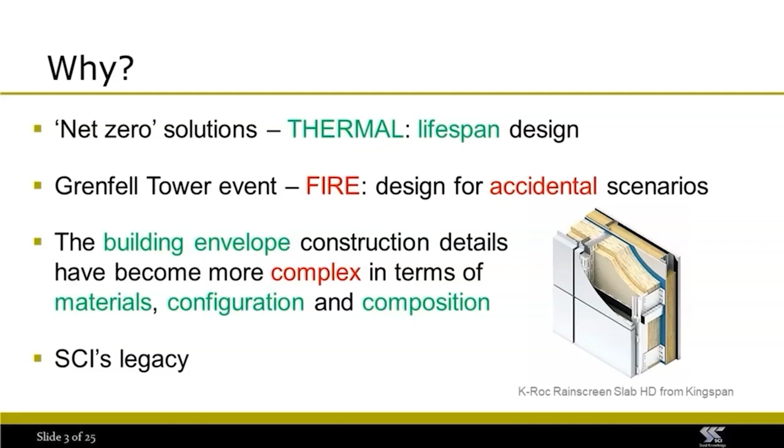SCI is in a unique position to help the industry in providing consultancy and assessment of construction detail solutions for the building envelope towards a more efficient insulation system, contributing to the net zero carbon philosophy.

So when we refer to the term building envelope, what we specifically refer to is the walls, floor, roof, windows, and doors. It is the physical separation between the interior and exterior - the climatic modifier that creates and contains the internal conditions.

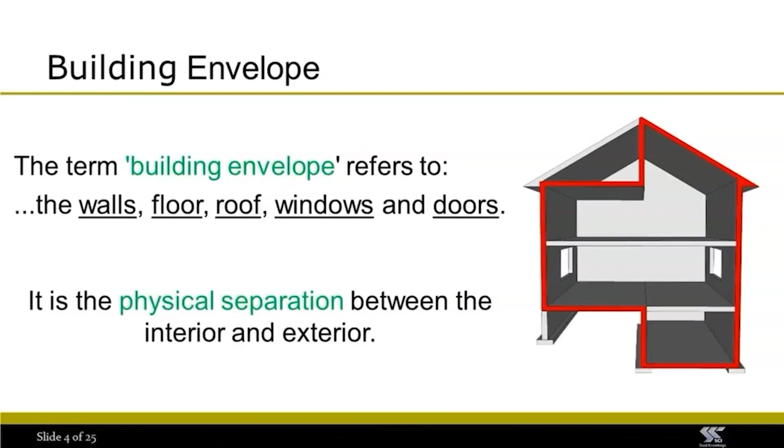SCI has been involved in several multi-year and multi-partner projects with focus on the thermal performance of buildings. Two of these projects where SCI acted as the coordinator partner were TABASCO and BATIMASS. Among other topics, the importance of thermal bridging in steel construction was investigated for both hot-rolled steel and light steel frame systems.

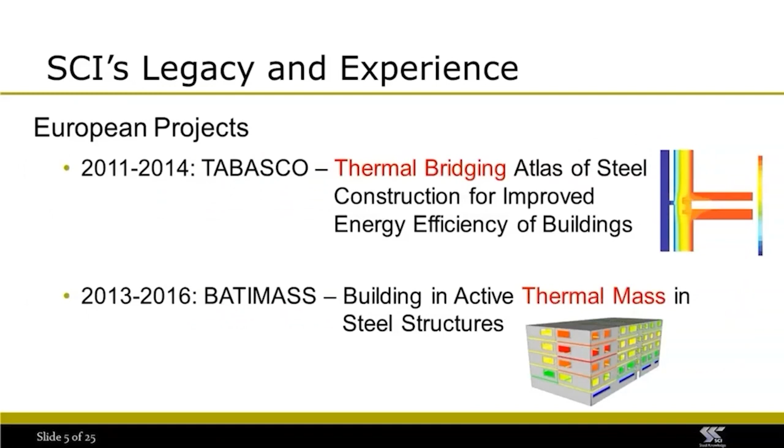Thermal bridges within the thermal insulated layer of a building, or at junctions in building envelopes, occur in all forms of construction and should be minimized as they add to the overall heat loss. For structures in steel, since steel has high thermal conductivity, this is of great importance.

Thermal bridges occur where the insulation layer within the building envelope is penetrated by material with relatively high thermal conductivity, and at interfaces between building elements where there's a discontinuity in the insulation.

Thermal bridges result in local heat losses, which means more energy is required to maintain the internal temperature of the building, and lower internal surface temperatures around the thermal bridge, which can cause condensation that may lead to mold growth.

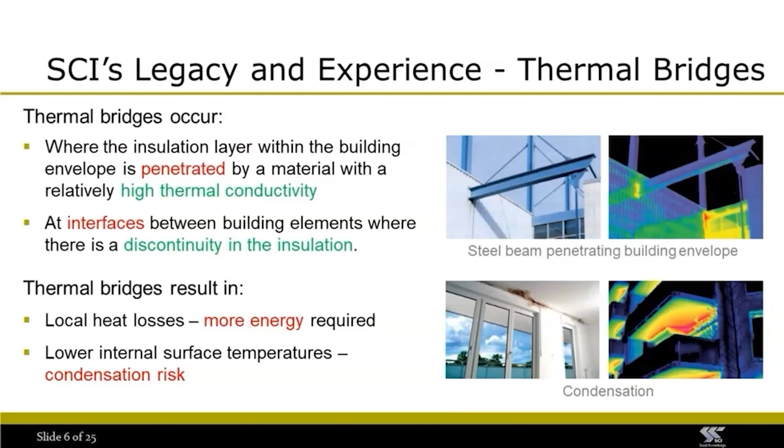SCI's most recent publications on thermal bridging and guidance to minimize their effects are P410, which focuses on structures with hot-rolled steel members, and P411 for light steel framing and modular construction.

P424 is one of the latest SCI publications, and as Callum touched upon, it provides guidance on how light steel frame buildings should be designed and detailed to provide fire resistance in accordance with the building regulations.

To assess an element in fire or thermal insulation, certain design criteria need to be determined. For fire, this is the resultant temperature profile of the system in consideration after a 30, 60, 90, or 120-minute exposure to fire, while the thermal insulation performance of a planar element can be expressed as a U value, which relates to an area, or a psi value, which is associated with linear thermal transmittance.

Condensation risk, given by the calculation of the fRsi value, may be determined accurately using advanced thermal modeling, but more details on this a bit later on. An assessment will allow us to quantify the effect of thermal bridges and the consequence on the use of appropriate thermal breaks to minimize heat loss.

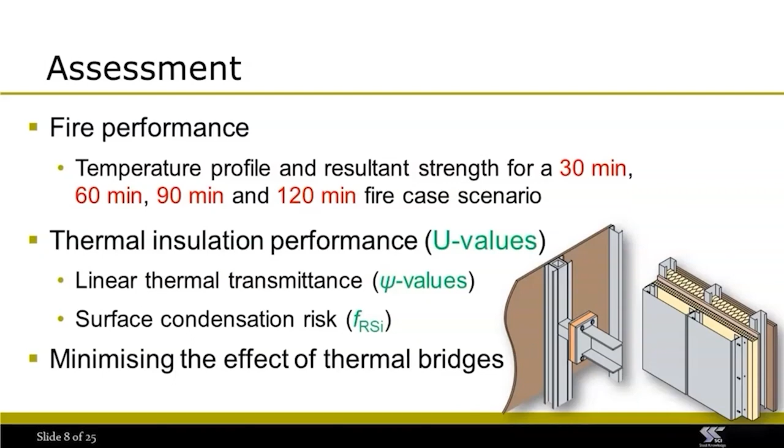SCI has developed algorithms for facilitating the conversion of 2D CAD construction details into 2D or 3D thermal models for use with software such as finite element analysis software, which is capable of carrying out a transient heat flow analysis, allowing study of a fire case scenario where the radiative heat transfer is nonlinear.

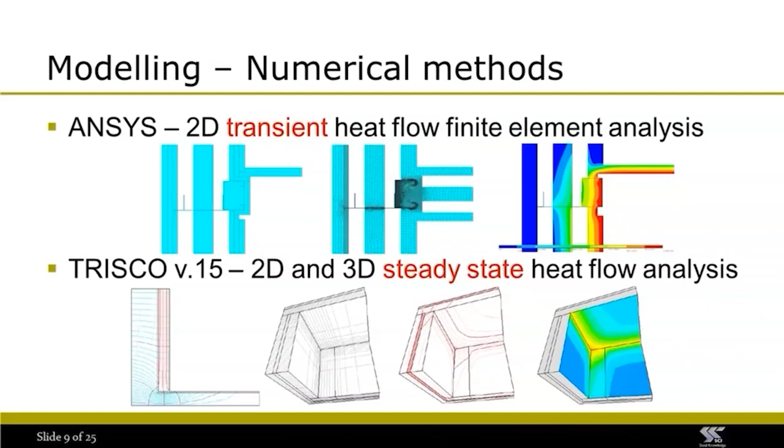For a thermal analysis where the insulation properties of a construction detail are needed, such as thermal transmittance or the risk of condensation, the Trisco software is preferred, which allows detailed 3D modeling in a steady state heat flow analysis.

Therefore, a thermal insulation model analysis is a static flow one, with the relevant boundary conditions defined on the external and internal surfaces with the respective temperature transmittance conditions.

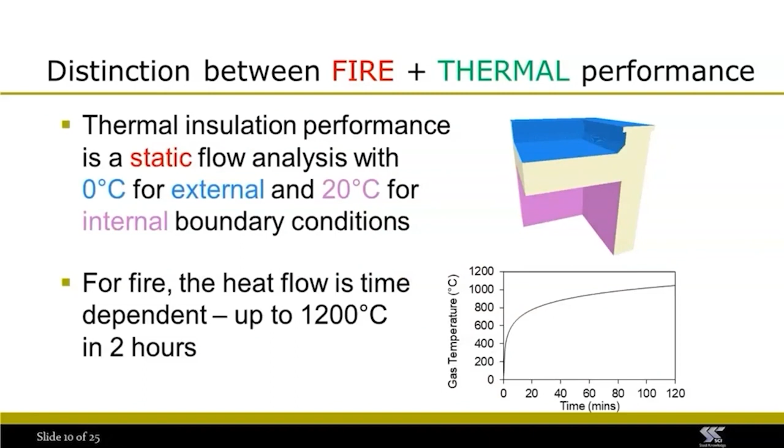In the fire model, a heat source is modeled with the temperature varying in time. The Eurocode standard time temperature curve described in Eurocode 1, Part 1-2, was used for the application of convective loads.

In a fire analysis, once the temperature data are obtained, the structural performance of the components can be determined at elevated temperatures. For steel components above 400 degrees, the strength is determined using strength reduction factors from Eurocode 3, Part 1, Part 2, and a similar procedure can be applied to other structural materials.

The finite element models can include components of various different materials which need to be modeled accurately in the software. Thermal properties of the materials, such as thermal conductivity and specific heat capacity, need to be specified.

For many materials, these properties vary with temperature, although for steel, these properties are given in Eurocode 3, Part 1, Part 2. For many other materials, such as plasterboard and insulation, they are not readily available.

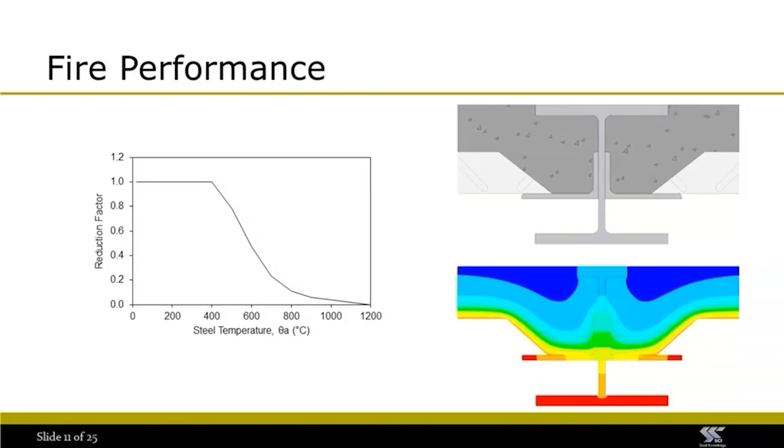Therefore, it is often necessary to calibrate finite element models against test data. This may typically be achieved using temperature data recorded during fire testing of an element construction, for example a wall or floor, which includes the same materials in a similar arrangement to the construction detail being modeled.

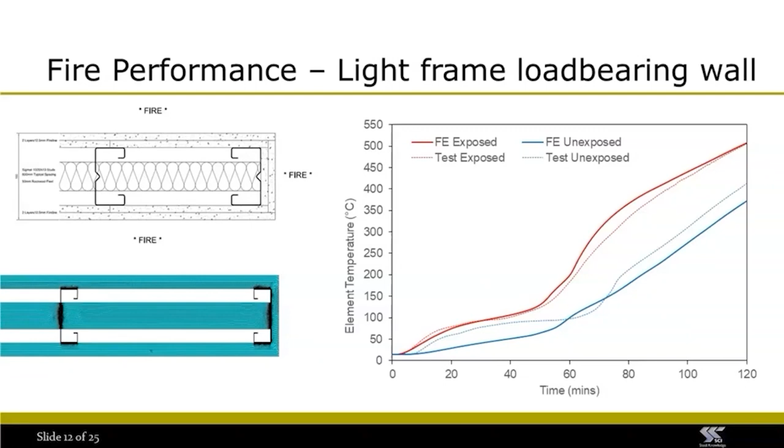The graph shows how the test and FE compare for a light frame load-bearing wall case study, where the characteristics of insulation and plasterboard were parametrically studied.

Another aspect to consider is that not all components will be permanent in a fire situation. For this reason, SCI has developed a methodology of thermal modeling which allows specific components of the detail to be removed from the model at a specific time.

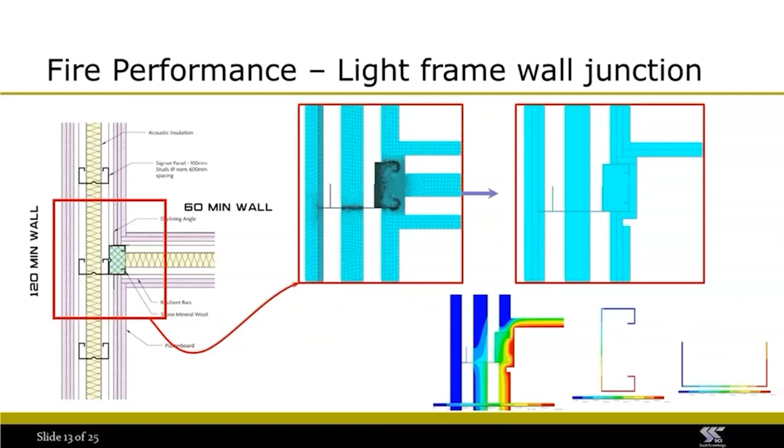The methodology then allows the analysis to continue from the point where the element was removed, with a continuation of the temperature profiles. As illustrated here, the FE model is simulating a case scenario where part of the wall is destroyed.

The location of the furnace, which is the heat source, relative to the construction detail being examined needs careful consideration and skill by the modeler, as this can be significant to the results.

The SCI has carried out this type of thermal analysis for fire conditions for a range of construction details, including hot-rolled hollow section columns in modular frames, light steel frame walls and junctions, composite slabs and support details, steel beams

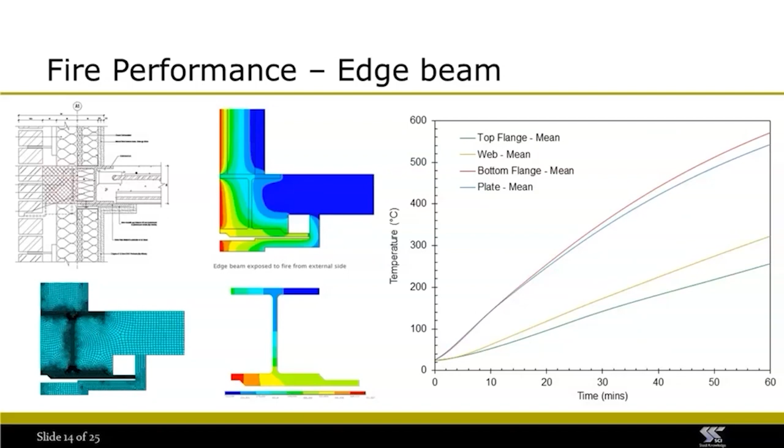embedded in concrete, and hot-rolled steel edge beams, which is illustrated here with the graph showing how the temperature of different parts of the beam, such as the web and flanges, vary in time with increasing temperature.

Now, moving from fire to thermal insulation, to satisfy the building control requirements of thermal efficiency in the UK, it is necessary to demonstrate compliance with the building regulations.

Part L of the building regulations addresses energy efficiency requirements in buildings in England and Wales. Section 6 of the Scottish Building Regulations is the technical handbook that deals with energy within the built environment. Similar regulations exist for Ireland.

SAP 2012 and SBEM are the two national calculation methodologies for calculating the energy performance of a building. SAP 2012 is a standard assessment procedure for dwellings, and SBEM is the simplified building energy model for buildings other than dwellings. Both SAP 2012 and SBEM require the designer to have knowledge of the thermal bridges, because heat losses

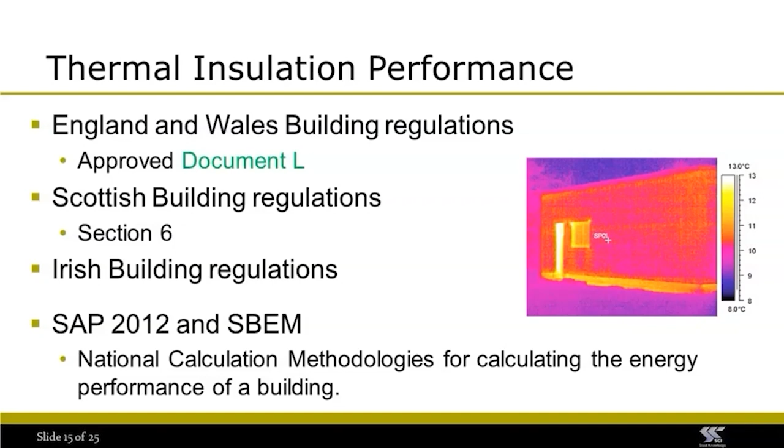through thermal bridges must be included in the calculation of predicted rates of CO2 emissions.

Regulations generally use the U value as the measure of thermal insulation of planar elements because it includes the three major ways in which heat loss occurs: conduction, convection, and radiation. A lower U value means a higher level of thermal insulation. The units of a U value are watts per meter squared per degree Kelvin.

Repeating thermal bridges, such as C-sections located within the insulated layer of light steel walls or brick ties, should be included in the U value of planar elements. Non-repeating thermal bridges, such as floor junctions, window sills, and ridges, form additional heat transfer paths that are not accounted for in the elemental U value.

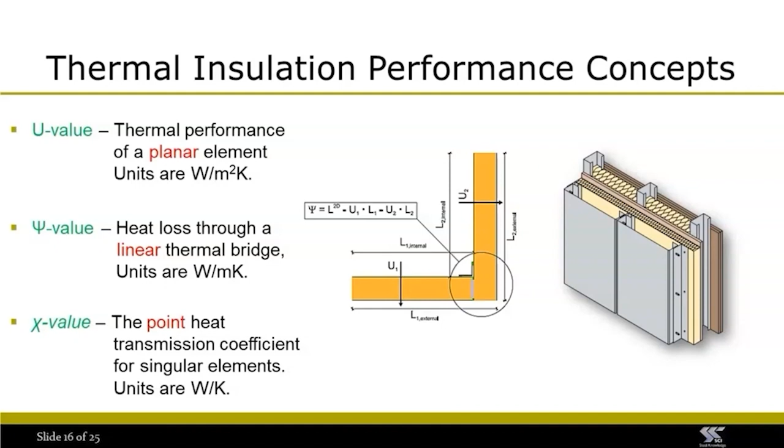These are accounted for in energy performance assessments by the linear thermal transmittance, or Psi value, for each thermal bridge. The units of the Psi value are watts per meter per degree Kelvin. The heat transfer associated with intermittent or singular elements, such as beams or other elements, can be quantified using the point heat transmission coefficient, Chi, with watts per Kelvin as the unit.

Low internal surface temperatures in the region of a thermal bridge can lead to surface condensation if they are below the dew point of the air. BS 5250, Code of Practice for Control of Condensation in Buildings, describes the causes and effects of condensation in buildings and gives recommendations for their control. Further information on condensation due to thermal bridging is provided in BRE Information Paper 1-06.

An indicator of condensation risk is provided by the temperature factor, FRSI. This factor is given by an equation found in the BRE paper. Accurate calculation of the surface temperatures is achieved through thermal modeling.

Minimum recommended values of FRSI, termed critical temperature factors, FCRSI, are presented in the table. The critical temperature factors depend upon the building use and the expected internal relative humidity of the building. The higher the likely internal humidity, the higher the critical temperature factor should be to eliminate risk of condensation.

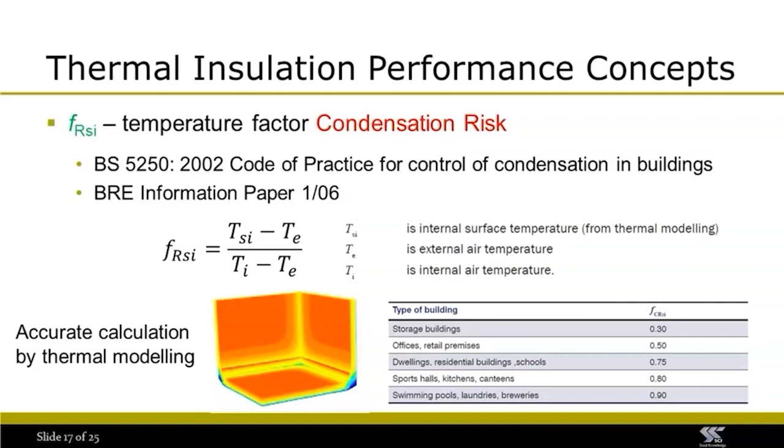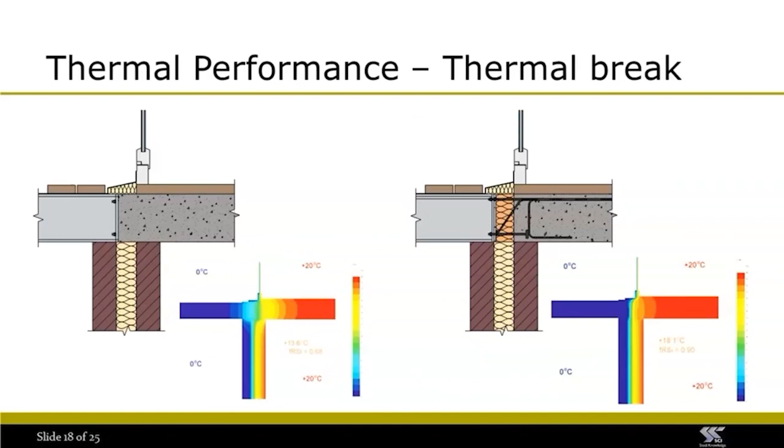A case study scenario here compares the thermal performance of a detail with direct connection of a steel balcony to the concrete slab with one that has a thermal break between the steel and the concrete slab. The calculated FRSI value with a thermal break is increased by about 30%, indicating a decrease in the risk of condensation.

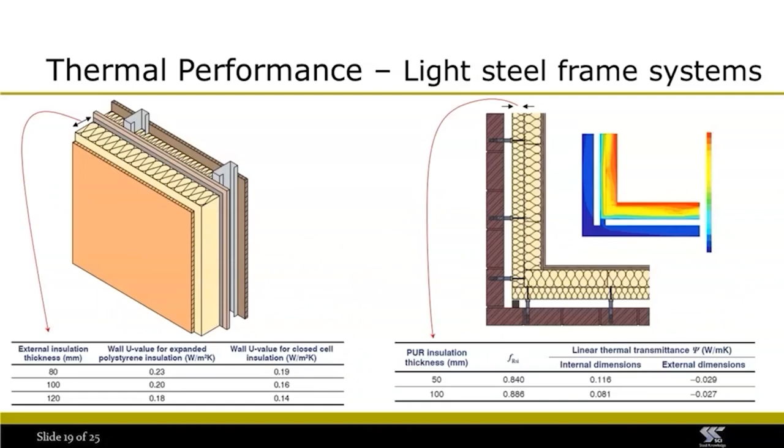Other studies involve parametrically investigating the effect of changing insulation thickness on a wall and junction, as shown in the two details for light steel frame systems. With increasing insulation thickness, lower U and Psi values are observed.

Thermal models can also be built in 3D when construction details require it. In this example, a light steel frame wall is connected to a solid concrete wall with the use of a wall bracket. The effects of the wall bracket acting as a thermal bridge can be viewed in the temperature contours after the thermal analysis.

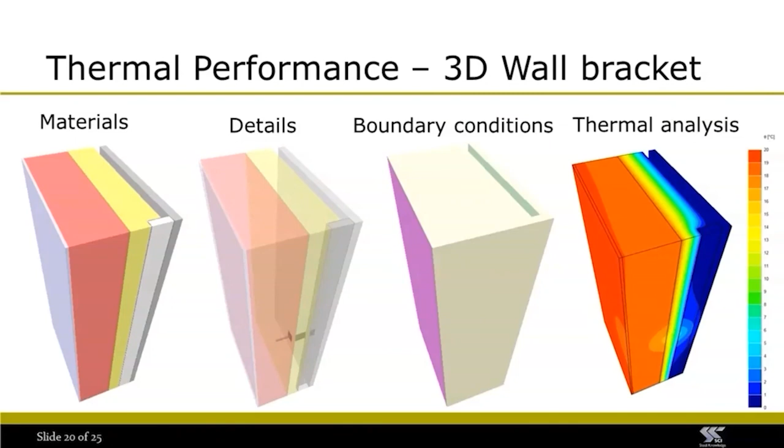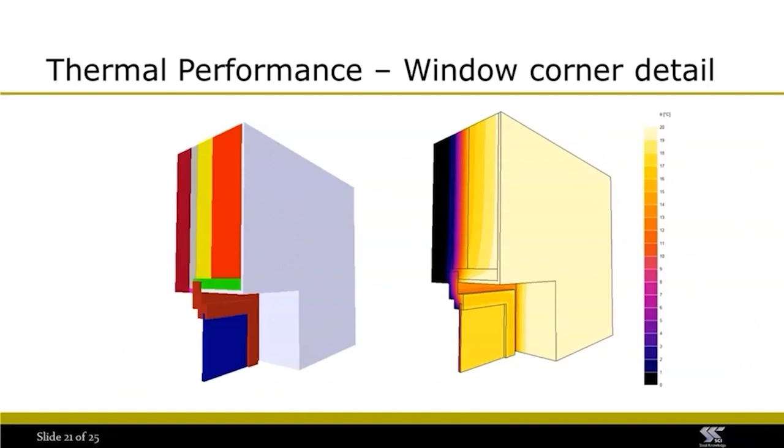Another 3D model here is a detail of a window corner, with the inside wall set at 20 degrees and the outside at 0 degrees. Not only a planar member or a junction, but a section of a building or a whole building may be modeled.

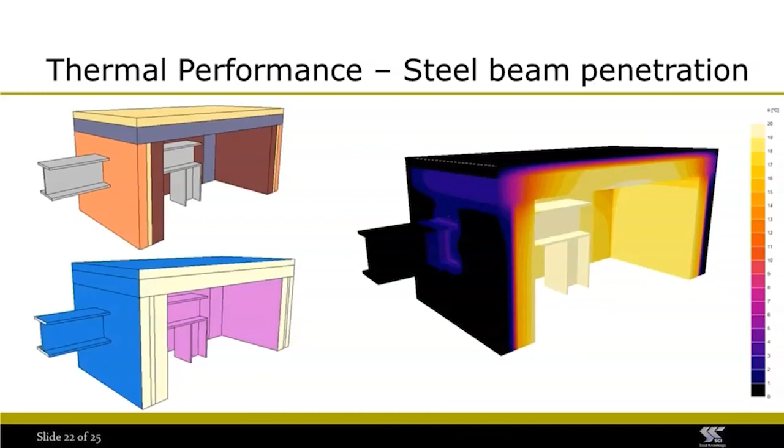In this example, the influence of a penetrating steel beam and its effect on thermal performance and condensation risk is assessed. At SCI, we're adaptable to the needs of the job and the client.

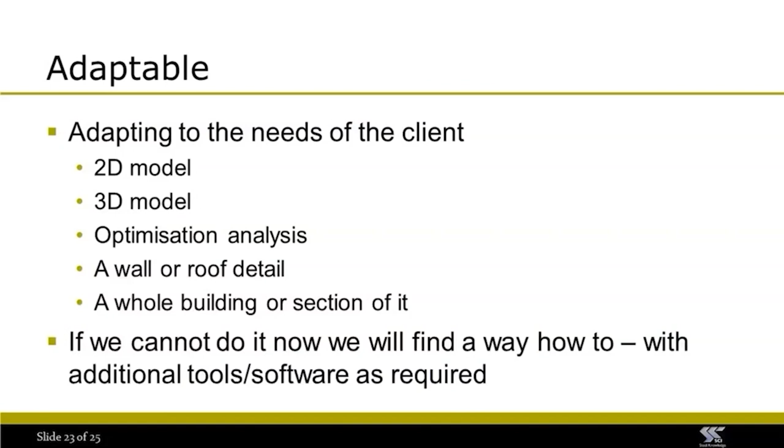We can model in 2D or 3D if needed, and carry out parametric and optimization analysis. The project may just be a planar element or a large section of a building. And if we cannot do it with the current tools we have now, we welcome the opportunity and challenge of expanding our knowledge for the needs of a certain project.

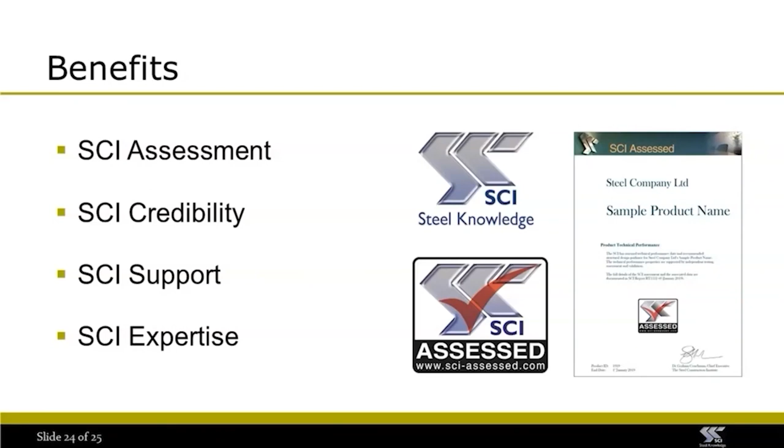The perks of having SCI carry out thermal modeling and assessment of your product or design is ensuring compliance with codes and building regulations. There is also our proven credibility and continuous support throughout the project's life, and not only then, since for our members, support is always our priority. We have the expertise, skills, experience, and knowledge to bring value. Thank you.